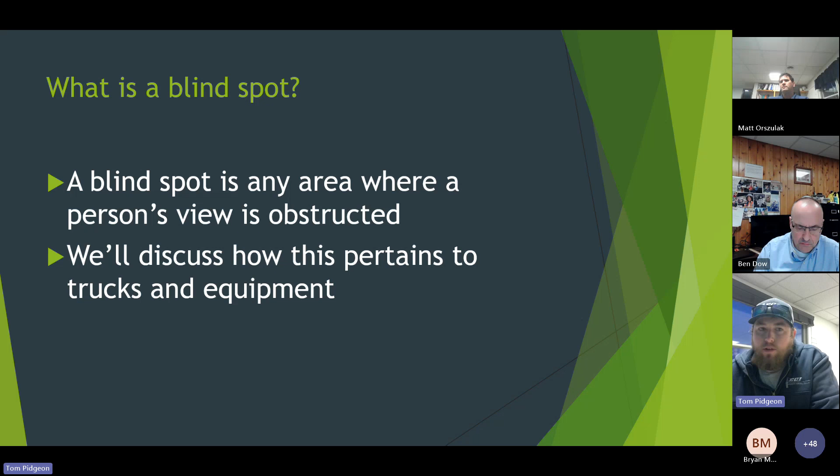If you've never sat in a dump truck and you're out on a job site with a little slow time, go ask a truck driver if you can come sit in the truck just to see where their blind spots are. I'm sure they'll say yes, because they don't want you in their blind spots. If you're around any equipment we show today, I'm hoping whoever's running that piece of equipment or truck is more than willing to show anybody their blind spots.

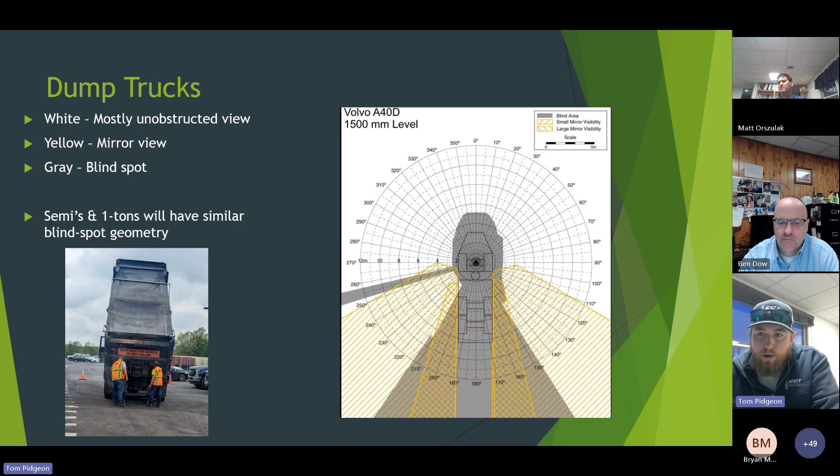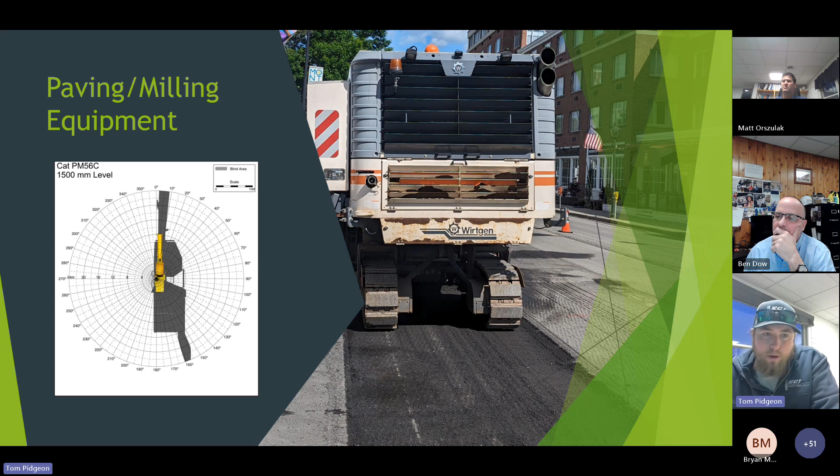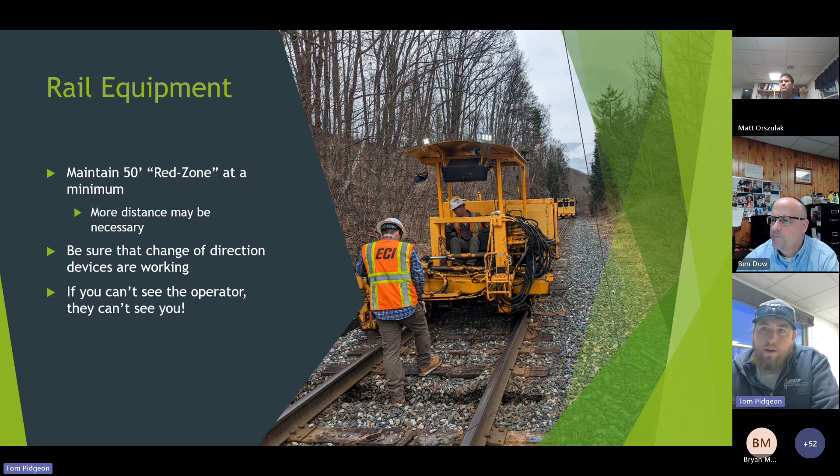More distance may be necessary for some equipment. So if you can't see the operator, you're too close. Make sure that if you're operating the equipment, your change of direction devices are working. And like I said, if you can't see the operator, they can't see you.

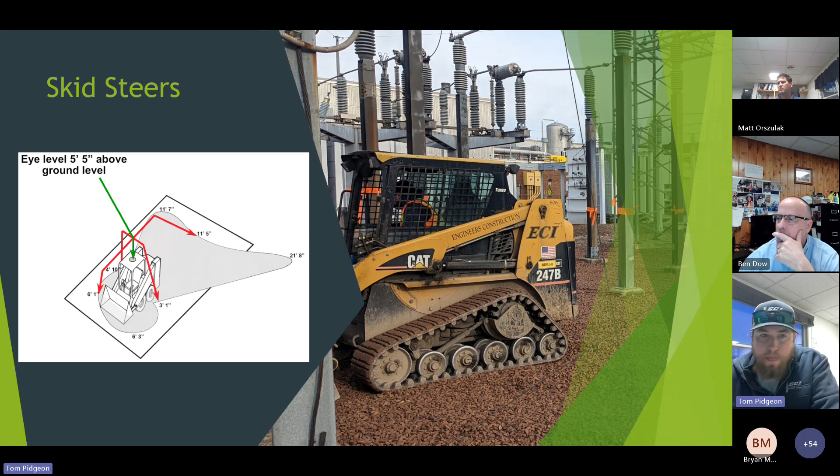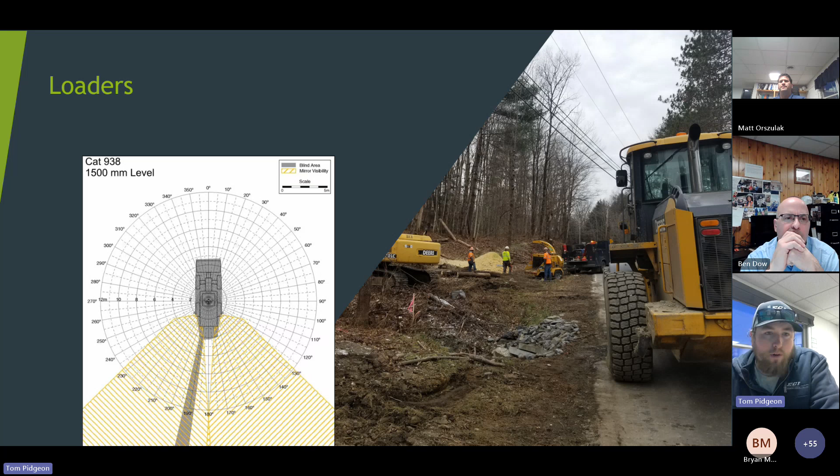Once again, just moving around in the cab to really make sure you're checking those areas.

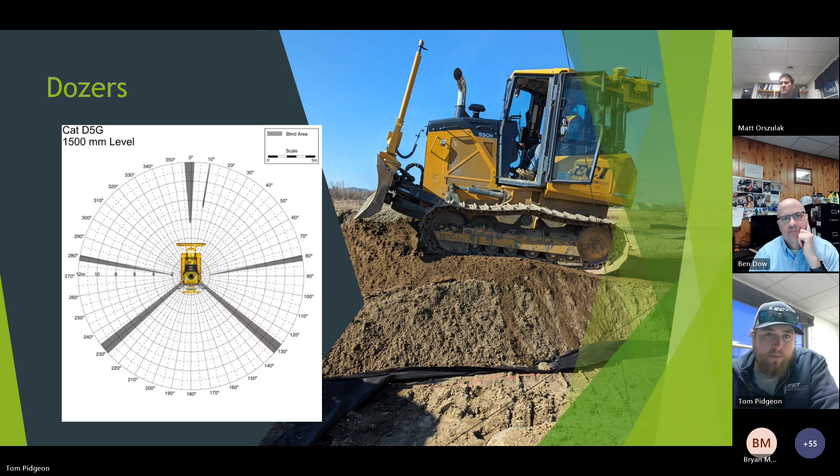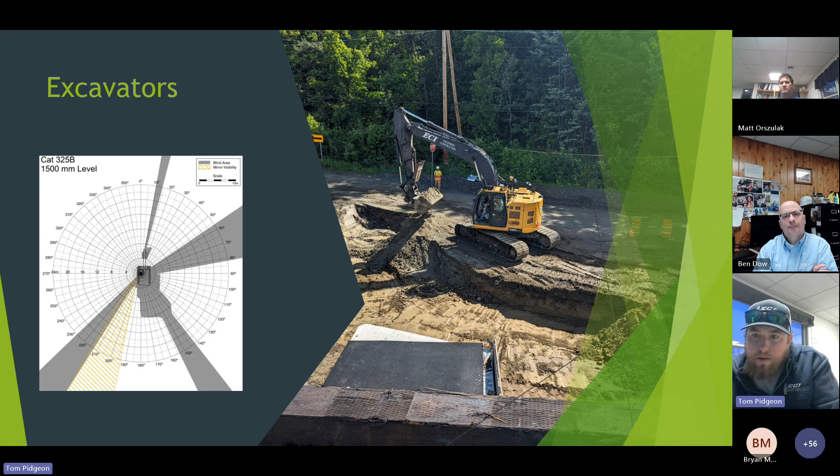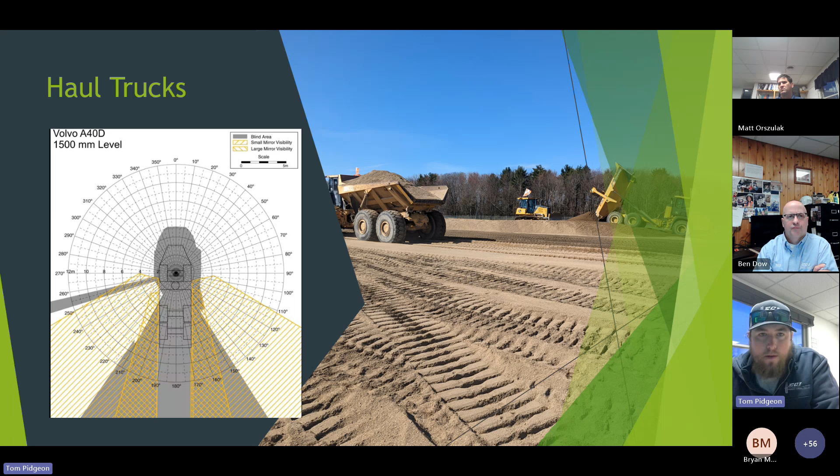what can he see? And the answer is pretty much nothing behind him. So the drillers are really good about using ground guides and spotters, but if you're a drill operator, it's just a good reminder to make sure you have one before you're shifting these machines around. And then with cranes, maintain your flagging or rope or whatever you're using to delineate the swing zone. And if you're walking, just make sure that you walk in a way the operator sees you before you go behind the excavator or behind the crane.

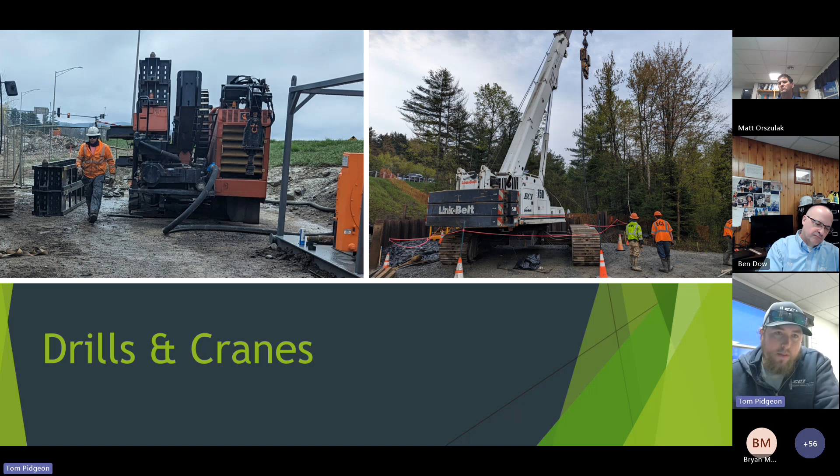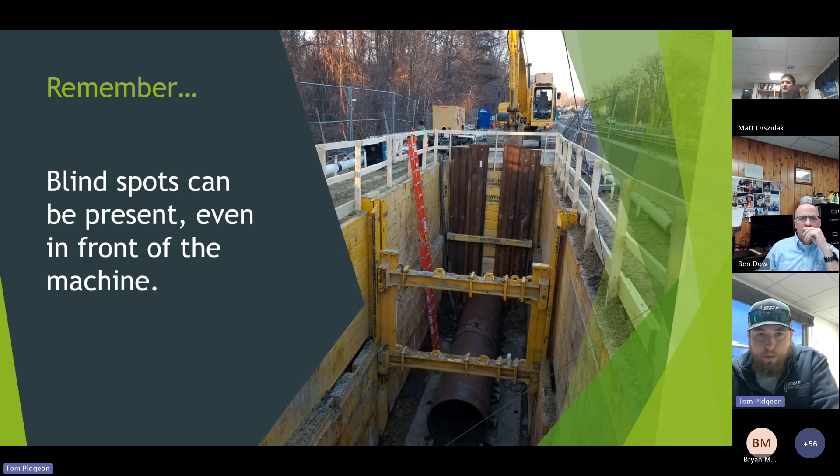And just a reminder, blind spots can be present even in front of the machine. So I think that's down in Lowell, Mass, and that's a 470 or 490 Komatsu up there. And do you think he can see the guys that are working right at the sheeting end of this box? Probably not, and I know not. So you might have to have somebody relaying hand signals up on the handrail before you can really do much down below. So just keep that in mind. The blind spots might be present in places you don't expect.

So what you can do if you're an operator or driver is back to our old acronym GOAL, which is get out and look. If you're ever in doubt, it's better to get out and look and take a minute to do that than it is to back or move your piece of equipment or truck without being certain what's around you. You always want to be aware of your surroundings, even when you're stationary.

So if you're sitting on a job site and even if you're sitting still and you're on your phone, you no longer have the situational awareness if you're texting or something like that of what's going on around you. So if you're always kind of keeping your head on a swivel and paying attention to your surroundings and you see somebody walk through the area, okay, now that person's on my radar before I back up. Versus if you're distracting yourself and things like that, then it might be more difficult to see them come in and you might not even know they're there.

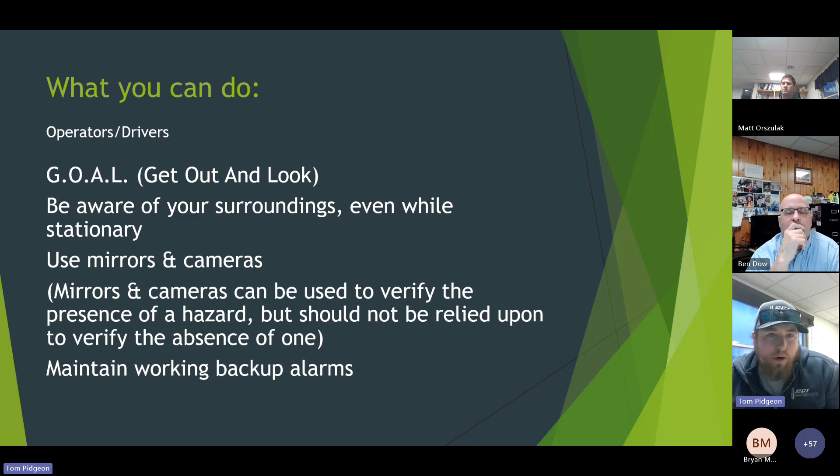You want to use your mirrors and cameras, but you should only be using those to verify the presence of a hazard and where it is, but you shouldn't be relying on it to verify the absence of one. So just make sure that we're really mindful of what's around us. And you want to maintain working backup alarms and change of direction devices.

So if you're working around equipment or trucks, you always want to wear your high vis. That's part of our uniform. That's why we have it, is so we don't get hit by cars or trucks or anything else. So that's preventing our caught between and struck by hazards.

You don't want to assume that you're seen. So you want to wear high vis clothing, but you want to think like you're wearing all black clothing. You want to be aware of blind spots on the vehicles and equipment and communicate your intention to enter a blind spot with the driver or the operator. If you can't see them, they can't see you. And make sure that you see their eyes, not just the back of their head.

You want to listen for backup alarms and watch for reverse lights. Always be aware of your surroundings and watch out for each other, the public, other contractors, and anybody else. So everybody on your crew might know where all the blind spots are on everything that we just talked about and anything else that you have on your job site. But does the flagger, does the uniform traffic officer, does the person that shouldn't be on the job site that's walking their dog through? And the answer is no, they don't.

So if you see something, say something, stop somebody, stop the equipment, whatever you need to do to keep an incident from occurring, because these can be really bad.

As a reminder, if you're in doubt about a specific blind spot, just ask the person operating or driving. If you're an operator or driver, please, please, please, if anybody asks, show them what you're working with.

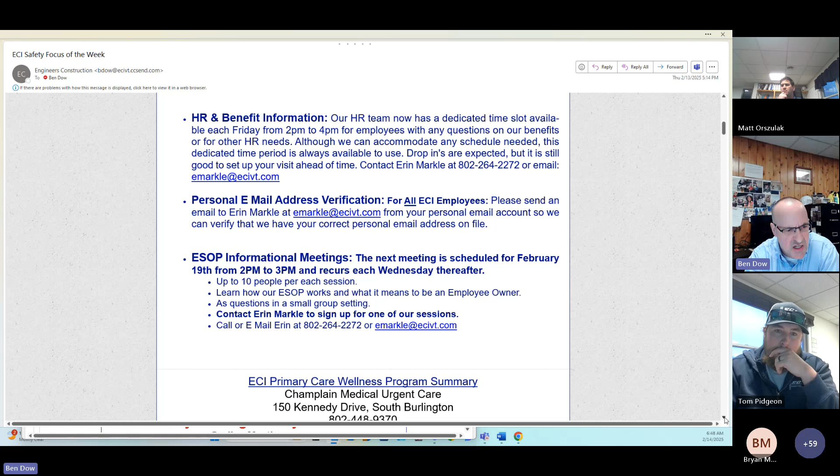So we talked about blind spots. We got a couple things here. On Fridays, the HR team, Erin and Melanie, and also Veronica and the others, are going to have a period of time, kind of like office hours, dedicated to HR related stuff, for when we have problems or questions about the ESOP, about our health care, our beneficiaries, supplemental insurances, and any other support we need. So that's from 2 p.m. to 4 p.m.

Every Friday they're dedicated to not having other appointments or meetings, so whether we walk in or plan ahead by calling them, they'll have that dedicated time every week to help us. That said, any other time we drop in at the front office, they'll accommodate us and help with whatever issues we have. If we plan ahead, we can set up a meeting anytime during the week. This 2 to 4 p.m. on Fridays is just meant to be added focus time for them, so someone will definitely be there if you want to pop in unannounced. You should be able to get in and get what you need.

That said, we also need to make sure we've all emailed Erin with our personal emails. The information is with her because a lot of things moving forward are going to come via email to get access to our ESOP information and ESOP portal. It's all going to be tied to our personal email. If we don't have those, we won't be able to get everybody onboarded as efficiently. We can always onboard manually up in the front office if there's a problem, and they'll help us, but we're trying to build that database with everybody's personal information. So if you haven't done so, or can't remember, send Erin an email.

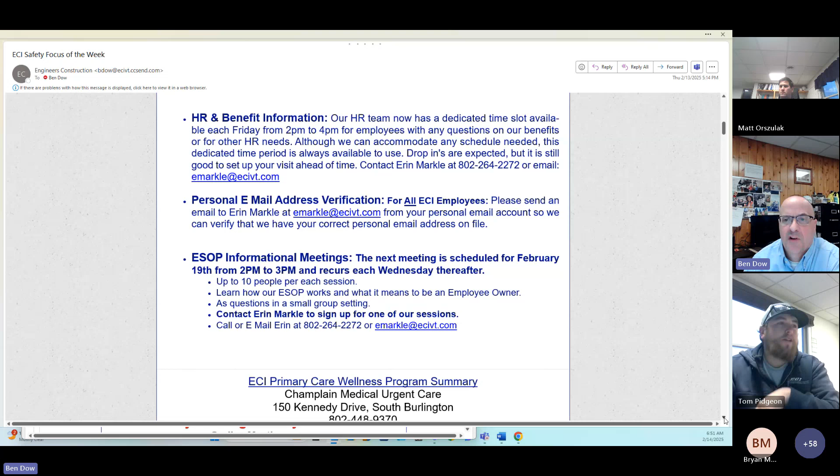Yeah, there's not much. If anybody has any questions, or if you're out there trying to get fuel, I'm here most of the time this time of year, so you can just come find me and I can help you out with it. Everybody's socials are live, all the asset numbers are live. You still need to do off-road diesel logs in Teams like normal, but it's a pretty slick system. Let me know positive or negative feedback about it once you use it. Thank you, man - I didn't mean to blindside you, but I knew you'd be able to handle it. So if anybody has a problem with that, come back over to the office and let us know. Don't go without fuel. It's pretty cool to have a slick system. So thanks, man.

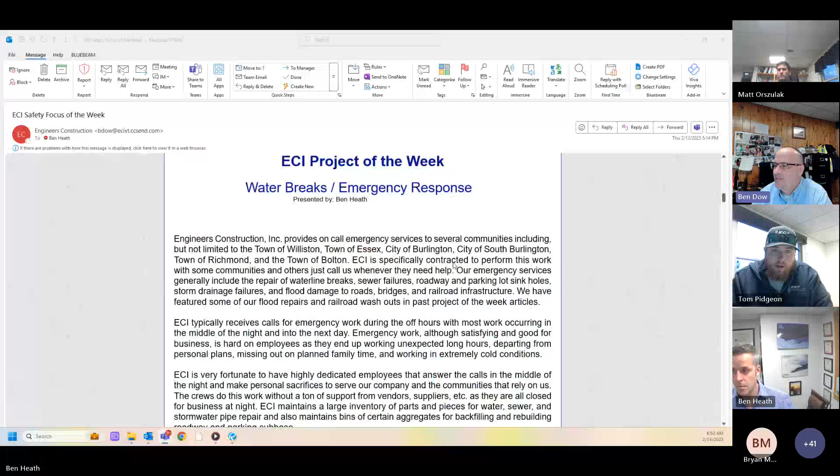Okay. Project of the week: this week we've got water breaks, emergency response. We do have a few photos that we didn't get in there, that we got later, that Heath will show us. So I'm going to let Heath take over.

I did get an email from Stu King - whoever remembers Stu King, he was our first safety director here at ECI. He read our email of the week, and sent me this email at like 11 o'clock last night. It says: 'There is no company that compares to ECI for dedication to emergency response to state, community, and corporate situations! Always on call, always respond, employees who care and serve. Stu.' So those of you that remember Stu, he reads our focus of the week every week. One of the things I'm going to do is have Matt contact him and see if he can come on so we can feature him and have him give us a safety talk one of these weeks. I'm sure he'll do it.

I think we need to all cram upstairs to watch it though, Ben. Yeah.

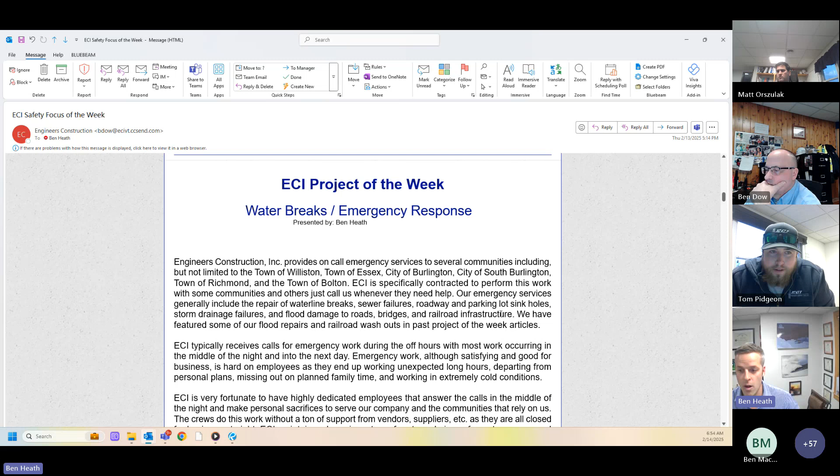ECI typically receives calls for emergency work during off hours, with most work occurring in the middle of the night and into the next day. Emergency work, although satisfying and good for business, is hard on employees, as they end up working unexpected long hours, departing from personal plans, missing out on planned family time, and working in extremely cold conditions. ECI is very fortunate to have highly dedicated employees that answer the calls in the middle of the night and make personal sacrifices to serve our company and the communities that rely on us.

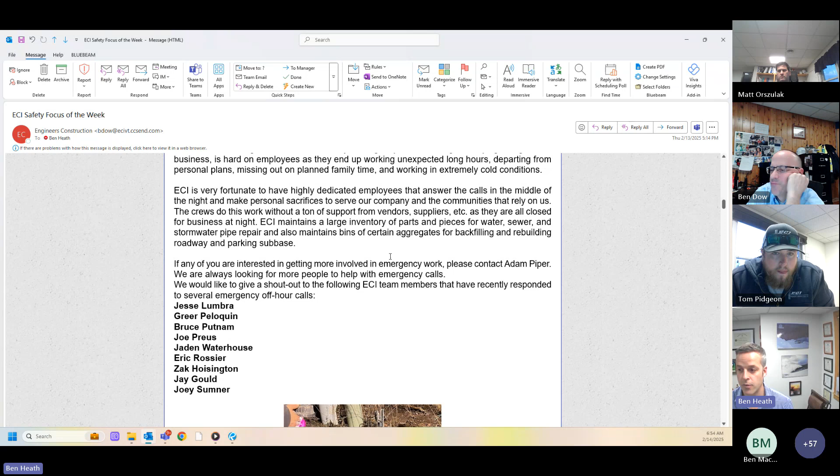The crews do this work without a ton of support from vendors, suppliers, etc., since they're all closed for business at night. ECI maintains a large inventory of parts and pieces for water, sewer, and stormwater pipe repair, and also maintains bins of certain aggregates for backfilling and rebuilding roadway and parking lot subbase.

If any of you are interested in getting more involved in emergency work, please contact Adam Piper. We are always looking for more people to help with emergency calls.

We would like to give a shout out to the following ECI team members that have recently responded to several emergency off-hour calls: Jesse Lumbra, Greer Peloquin, Bruce Putnam, Joe Preus, Jaden Waterhouse, Eric Rossier, Zak Hoisington, Jay Gould, Joey Sumner, and Brian Harrington, and all the other ones we didn't mention. There's lots of people that have gone to emergencies - this is the core group that has gone to several of them during off hours this year in the last 12 months. So these photos are an accumulation of multiple emergency responses, mostly waterline breaks.

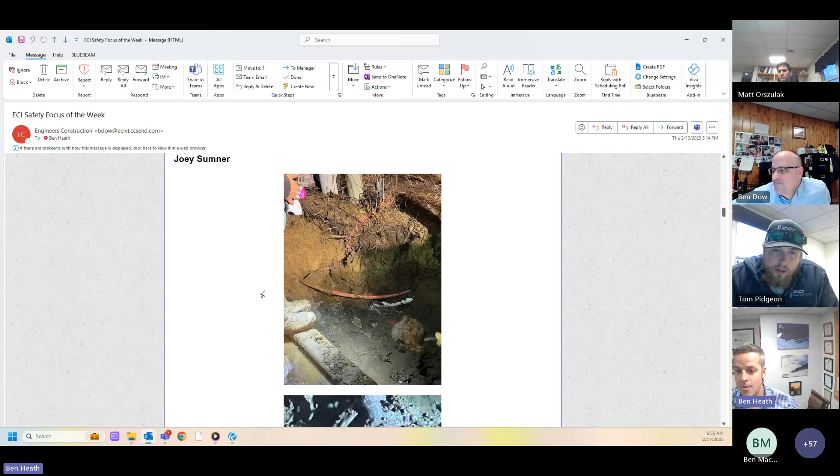This first photo is a great example of some of the stuff you run into. You've got water blasting out of the ground, and you've got utilities everywhere that you're trying to work through.

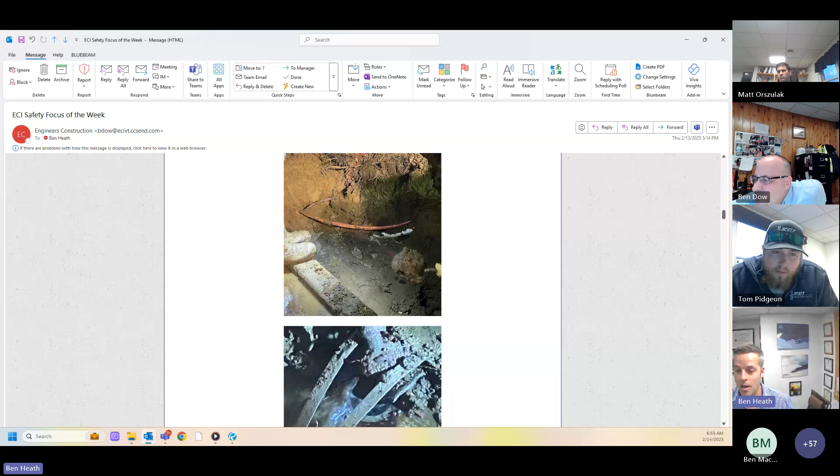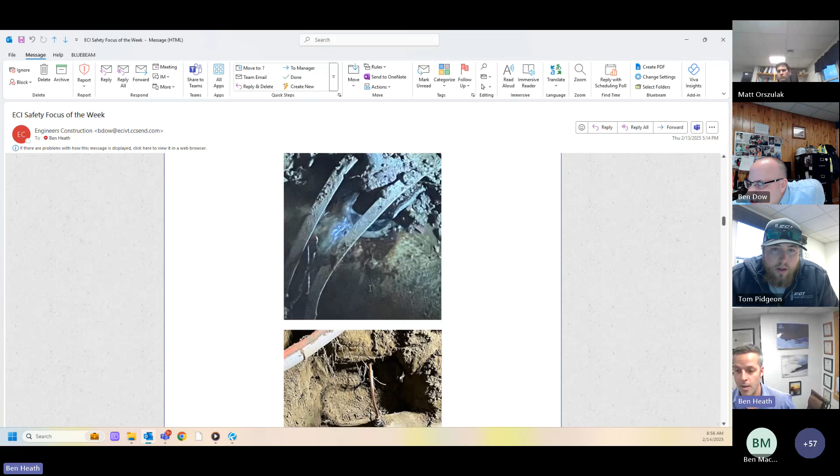It's not usually cut and dry, and there's not a lot of time to figure things out. For this particular one, this was a saddle - a water service on an AC water line that had broken and basically completely came off, and water was coming out of the corp hole in the pipe. This is the repair, and if you've ever worked with AC pipe, you know it's very fragile and breaks easily, so you really have to pay attention to how you support it and how you backfill it.

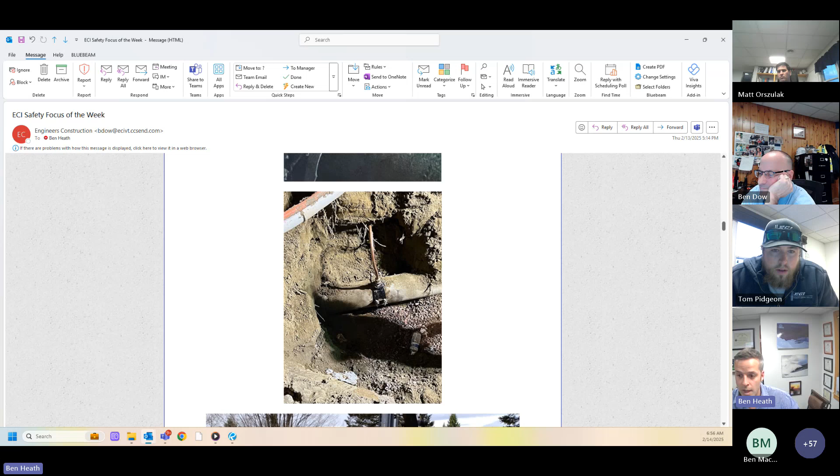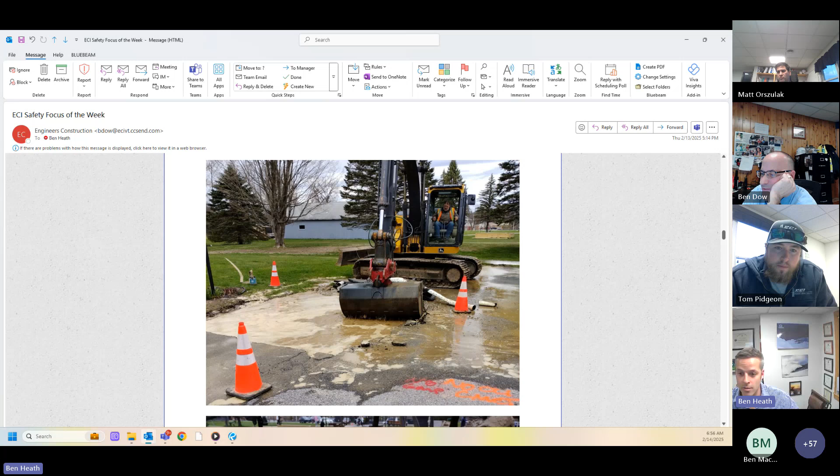Here's a good picture of what things look like when we arrive. This one looks like it happened during the day, which isn't that common. There's water flowing all over the place, and a lot of times the water is flowing in a location where the break isn't actually located, so you've got to really try to figure out where the water is coming from, not just where it's surfacing. In this particular case, it looks like they're digging right where the water is coming out of the ground, which sometimes works.

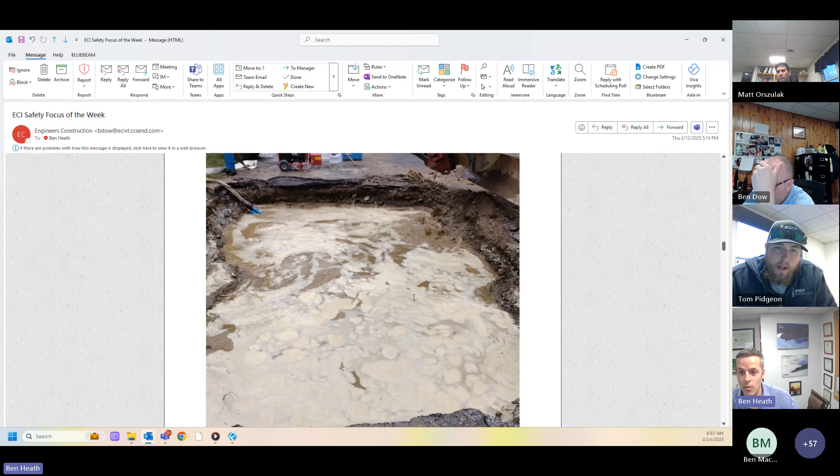Trying to get through the pavement, and then when you finally get the hole started, this is what it looks like. Depending on the size of the break, the water just pours in, and dewatering becomes a major effort - it's not uncommon for it to look just like that.

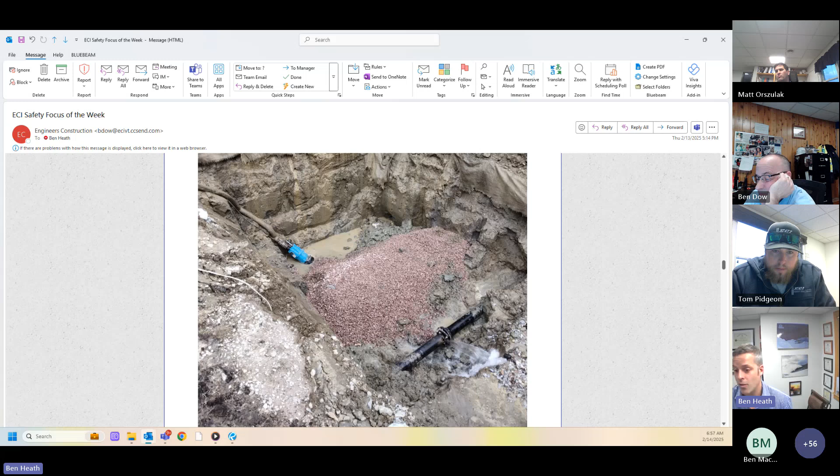And then when you finally get the water under control and the hole dug, this is that same project where the water is still coming out. We've got a break right here next to the joint, and we've got a sump set up and stone in the hole and the excavation made, and now it's time to hopefully depressurize the pipe, which is nice if you can, but sometimes the valves don't work or the communities don't know where their valves are, so that creates a pretty big challenge to get the repair done.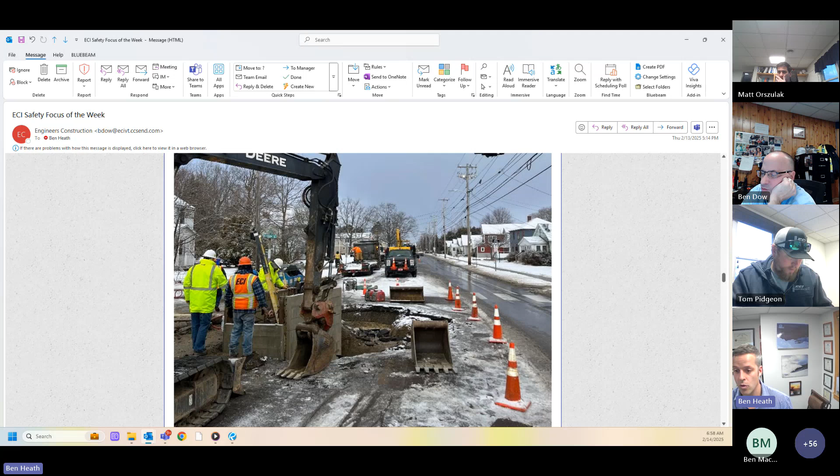Sometimes we work with the communities to do these breaks. In this case, the city had performed the excavation, had set their own trench box, and had been doing their own pumping. We went there to help them and relieve them. They had been at this water break for 28 hours when we got there, and they still didn't have the water under control, which you'll see in this picture. This is what we arrived to.

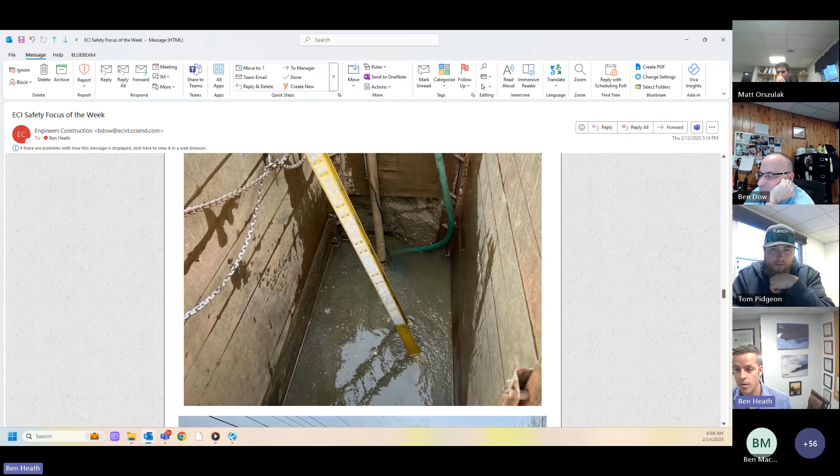They were able to dig down to the pipe and figure out where the break was, but they just could not get the water under control, and therefore they couldn't make a repair. We took it over and pretty quickly got the water under control, made the repair, and started backfilling.

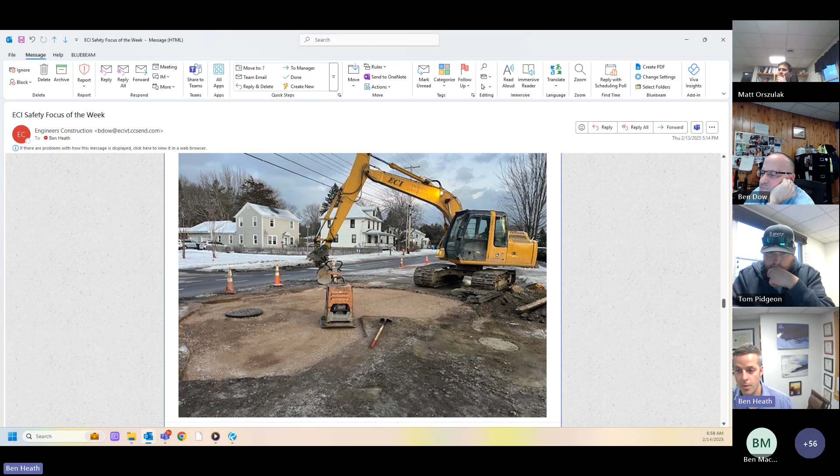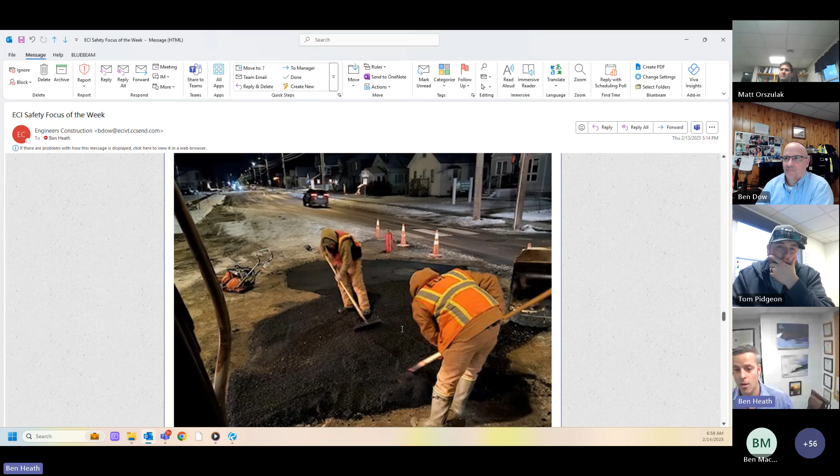Here's that same project, basically all prepared to pave at this point. And here are the paving guys out there. Like I said, in the middle of the night, we went all the way to Massachusetts for this asphalt. The city really wanted to use asphalt as a more permanent repair, as opposed to grindings or concrete, which they said if they used, they'd have to tear out in the spring. We did a little math for them and showed that it was actually cheaper just to put in asphalt from Massachusetts, so that's what they chose to do.

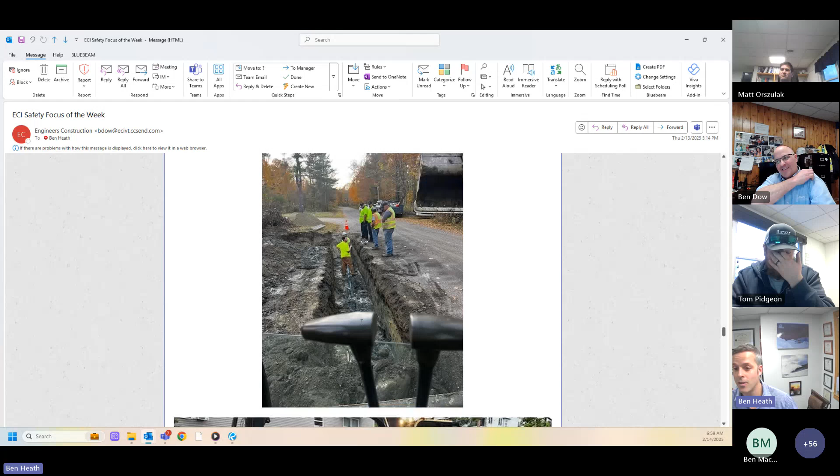Here's a supposed break in the town of Williston, where they had water surfacing. We dug and dug and didn't find any break anywhere, so it's unclear what the issue was or why they believed they had a problem. We searched and searched, didn't find anything, backfilled, and then never heard another thing about it. That happens sometimes.

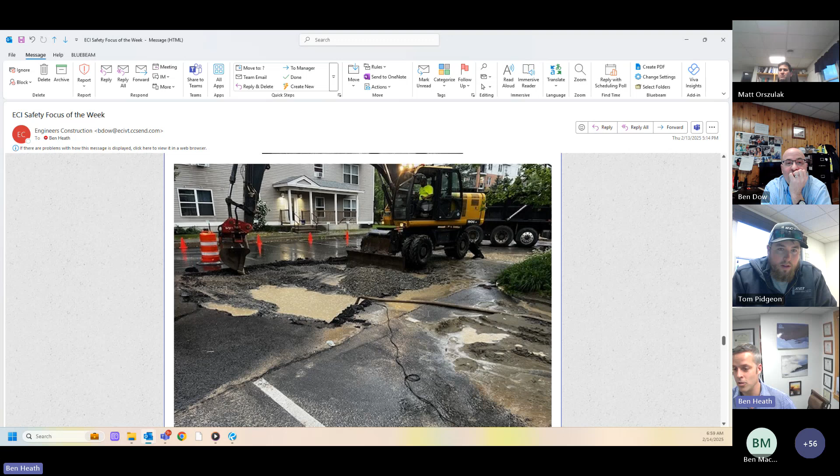Here's another one in a parking lot, I think this is at Odell. All of a sudden, all this water just starts boiling out of the ground, and sinkholes develop. This is a very busy area, and this parking lot's usually completely full of vehicles. They were quite panicked, and we went over there and helped them, and they were so appreciative. They brought us over a platter of edible fruits and chocolates, and those were in the dispatch room. Hopefully some of the people that actually went to that break got some of those.

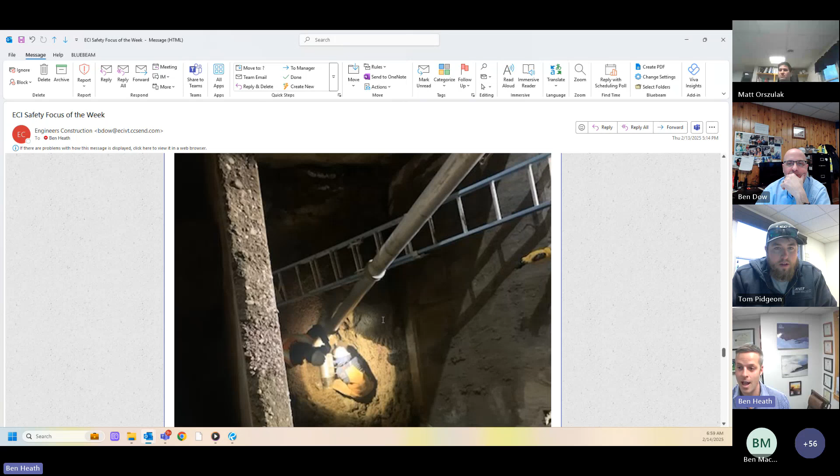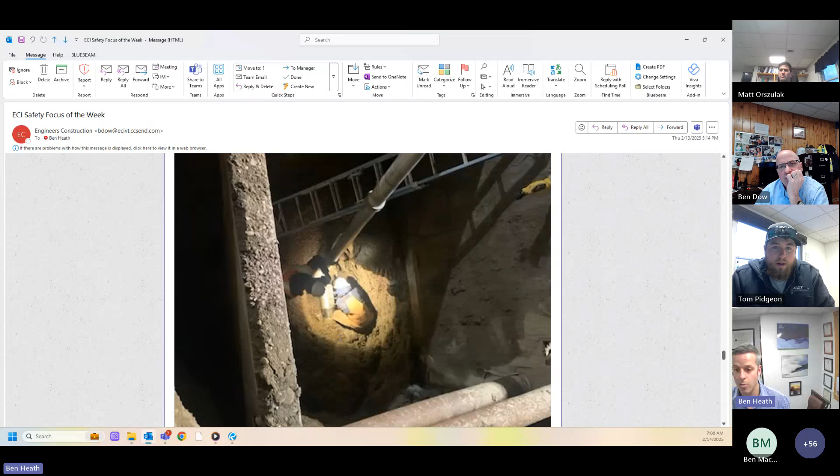Before we go further, do you have a couple other archive photos, don't you Heath? Can everybody see this? So it's not uncommon to dig down and find something like this.

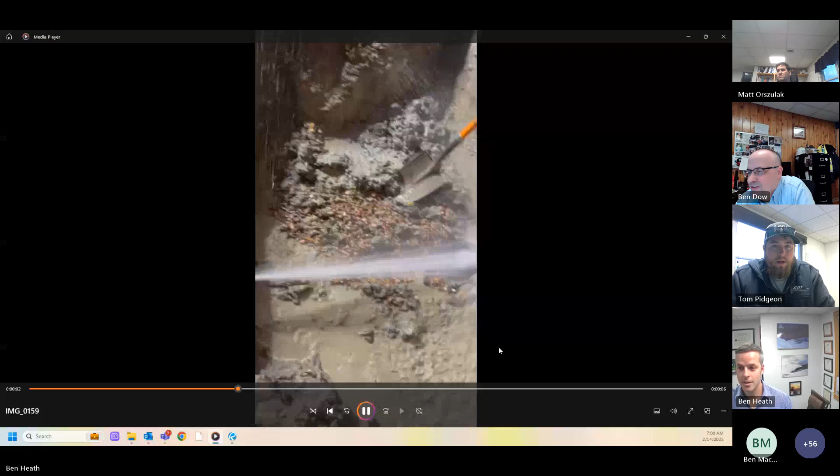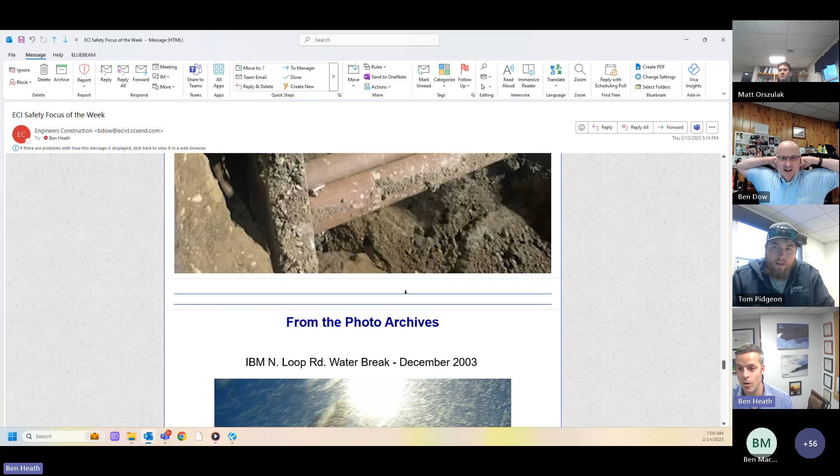Holy cow. And if the municipality is able to turn the water off, that's obviously not a huge problem, but it seems more often than not that they're not able to do that because their valves haven't been exercised, or they don't know where their valves are, or there's a cross connection they're not aware of. So our team at that point has to figure out how to fix it under pressure, which is very challenging.

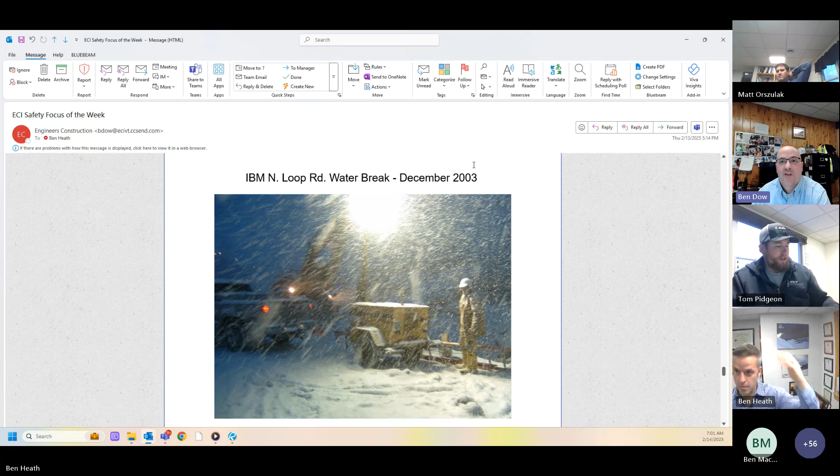Okay, I'll turn it over to you, Mr. Dow, for your archive photo. Yes, hold on, I'm just gonna switch over here. You want me to stop sharing? Yeah, can you hear me okay?

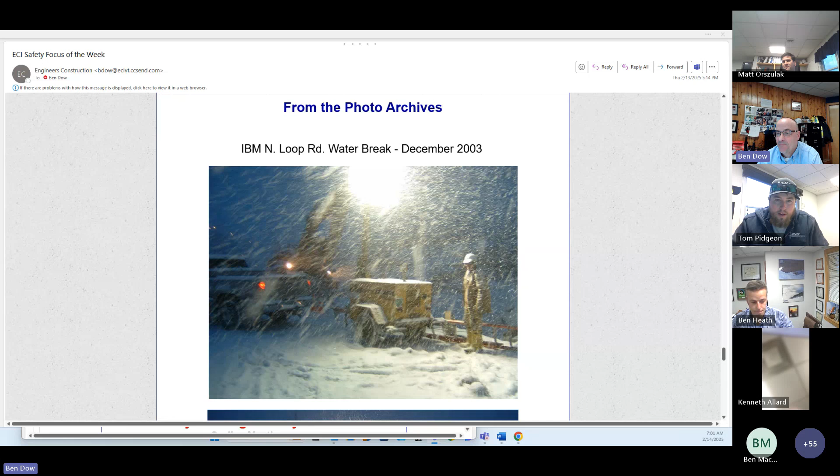So this is Michael Colby, 2003, North Loop water break, and there were 3 of us that responded to that, and that's the conditions that we arrived in. That just shows conditions aren't always favorable for a water break. You see that okay? That's Mike. And then there we are getting the box in and getting going.

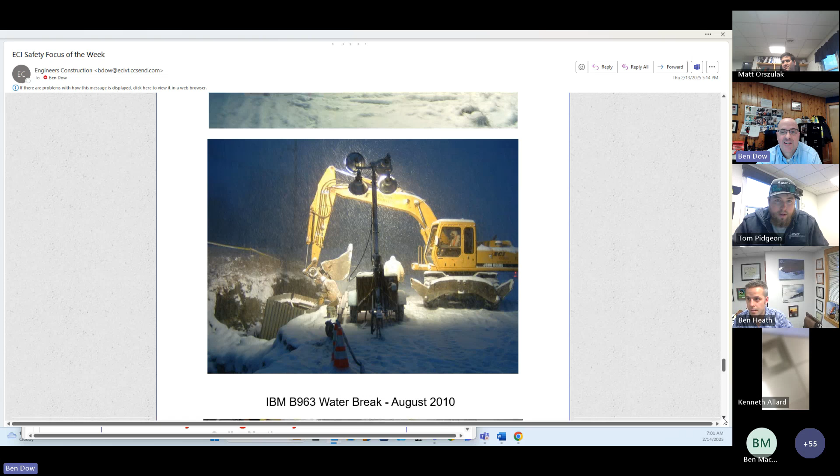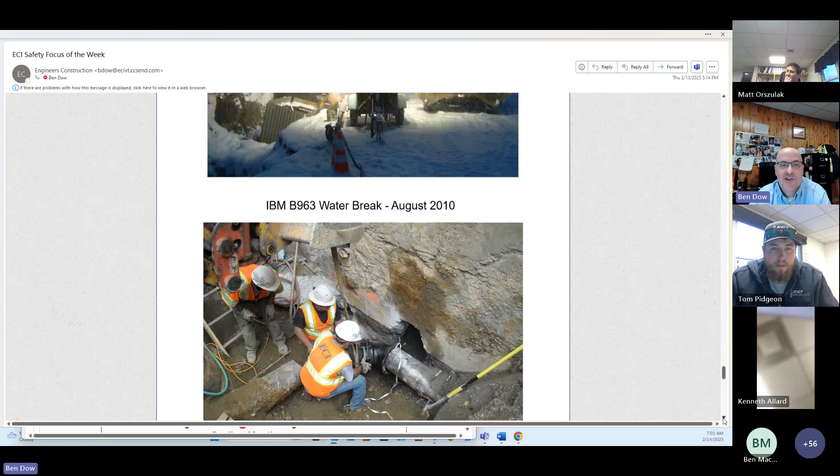Pretty nasty night. I found another one from 2010. This was a fire main break at 963. This is the one that stimulated Stu's call, because I think he was around then. But this was a major blowout. Look at the size of that line.

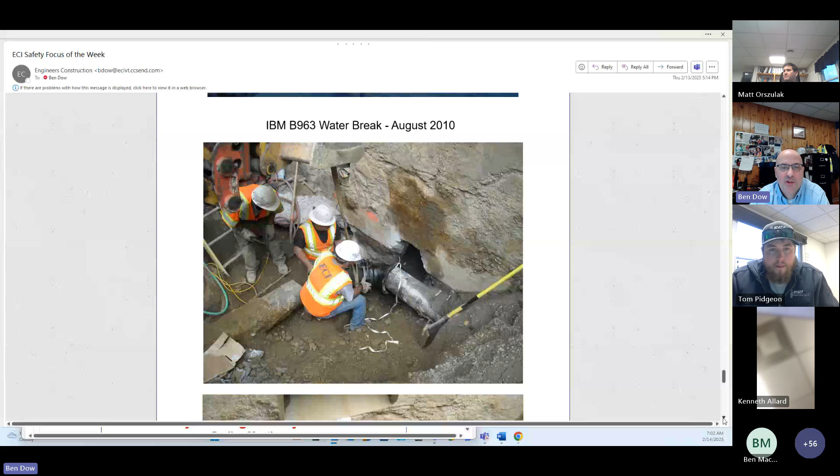We ended up having to put multiple fittings in there, as you can see, to get around that corner and put it all back together. That's a lot of parts: 1, 2, 3, several mechanical 45s, a couple 45s, and some mega lugs. That was quite a beast.

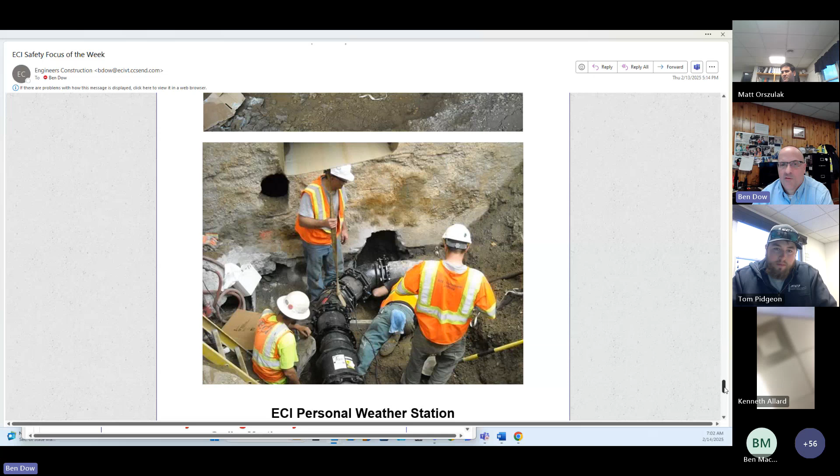So I do get out in the field, I did get out in the field once in a while in the old days, especially when stuff like this happened. That was the one that Stu King remembered, and he emailed that for us. So that's all I have.